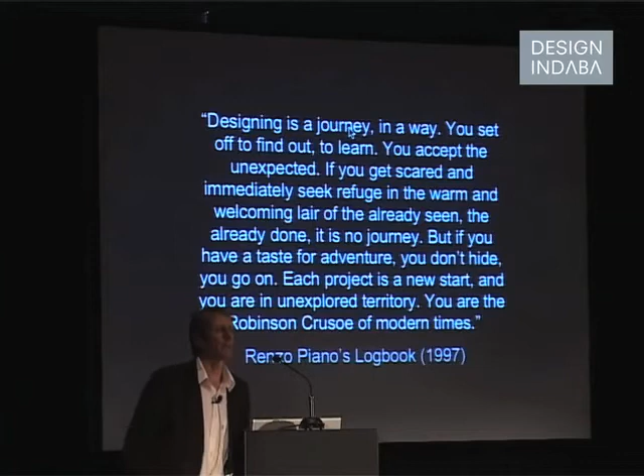One of our role models is Renzo Piano. There's an amazing quote about design and what it's about. Designing is a journey in a way. You set off to find out, to learn. You accept the unexpected. If you get scared and immediately seek refuge in the warm and welcoming lair of the already seen, already done, it's no journey. But if you have a taste for adventure, you don't hide, you go on. Each project is a new start, and you are in unexplored territory. You are the Robinson Crusoe of modern times. Renzo Piano.

Look, life is ironical. I really wanted to be a painter, and my ex-brother-in-law convinced me to become an architect. I now paint, but I have a concern for the city.

Being a busy architect, I believe that's where our interest should be. Our cities are a big concern. A lot of people live outside our cities. The densities of our cities are extremely low. A lot of poor people are traveling annually and daily on a massive scale. Our concern for cities had also brought us to go and study urban design. Pedro did it at WITS and I did it at UCT.

We've got the philosophy that all buildings, in fact, are little cities, and the city is a big house or a home. This notion comes way back from a man called Alberti, who in 1452 wrote guidelines about what the city should be about. He had guidelines for public buildings, houses, townhouses, country houses, etc. That was 1452. It's ironical now that people make suburban houses subscribing to stylistic styles.

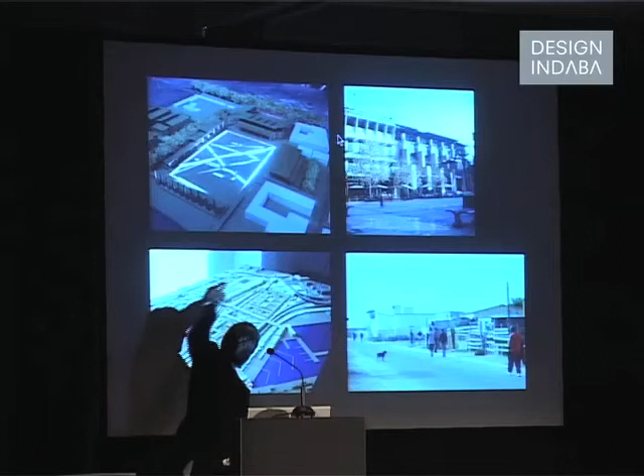The bottom slide indicates work I did with Roelof Uitenbogaardt on the Olympic Village in Cape Town's 2004 bid, done in 1996. It shows part of the city called the Culemborg, the big shunting yards lying unused. The idea was to convert that into public and private development, with a sports center developed over the railway line in a big public space. This would have been the Olympic Village, where about 24,000 people would be living.

On the top right you see the Melrose Arch project, flanking OMM, Andrew and Janina's project on the left, where the Moyo restaurant is in Johannesburg. Our building was part of that pattern of setting the urban spaces around it, making urban space. So in a sense, what we'd like to believe is that our buildings should make urban space wherever they are.

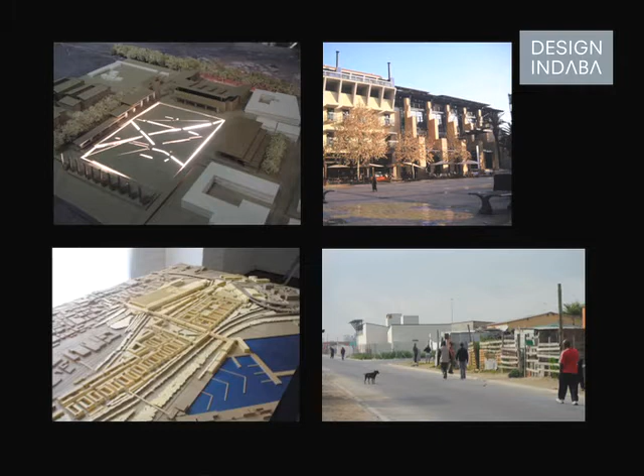The bottom right slide is a little creche we did in Kabodi Street in Brown's Farm in the Cape Flats, where we won a local competition, Jo Noero won the other jointly. We put together two of these creches, which we thought would become prototypical, doubling up as spaces that adults could use at night, and during the day serve as creches.

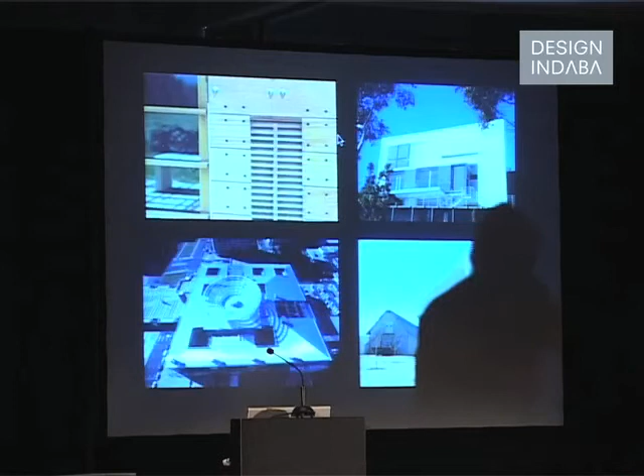The bottom slide indicates the farm I showed you before, where the notions of Cape architecture are expressed in a modern idiom, with the focus again being on the buildings making public space.

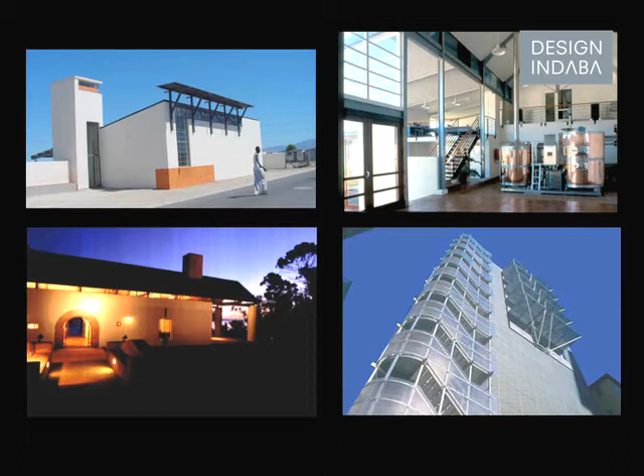Top left you see the creche, the way in which a little tower announces the entrance, and a seat where the children could wait for their mothers after work. This is quite an interesting community street, and the people who live there love it.

On the right-hand side at the top you see the Birkenhead Brewery, much earlier work that we undertook in Stanford. The brewery's kettles are actually exposed on the inside of the building, so you feel part of the brewing process. What they've done subsequently, though, they've changed this building, which makes one believe that once you finish architecture, you must take your photographs and run sometimes.

The bottom left is a building we did in Hermanus called Southwinds. It's really a retreat, based also on the traditional architecture of the Cape, with a roof that's cut loose from its structure, heavy thick walls with small openings. We branded this Corb Cape, referring to Le Corbusier in Cape Dutch architecture.

The bottom right is the Union House building, which is down the road from us, where we really just had to apply an urban screen to protect from the sun, and a new fire escape and balconies.

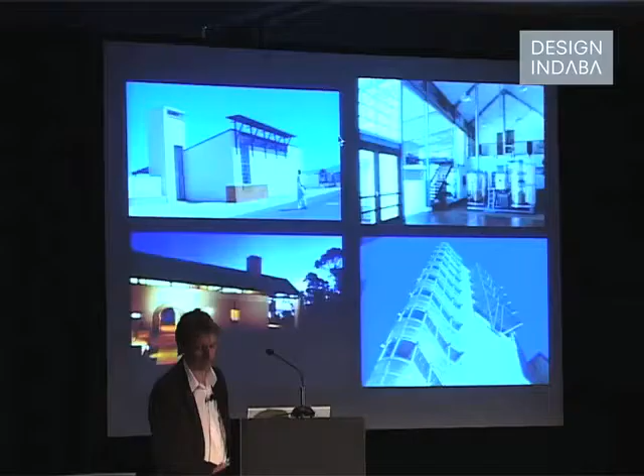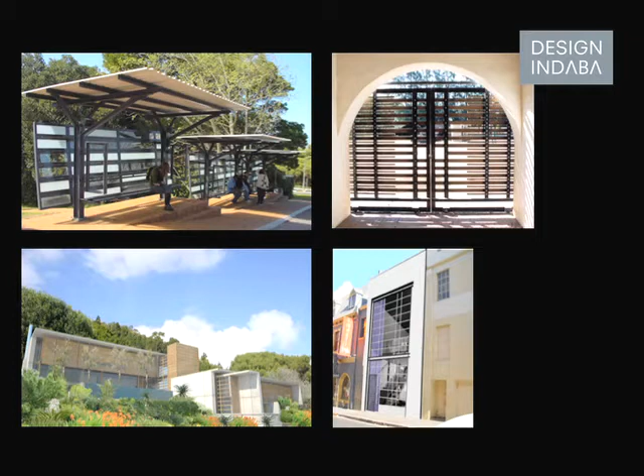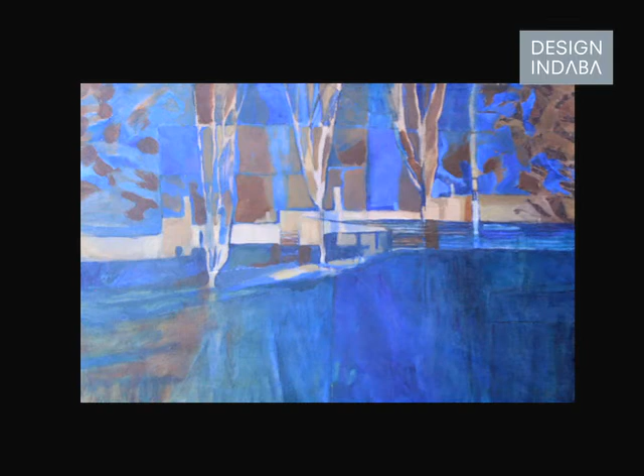In our architecture, we try to blend landscape with building as much as we can, and I think this painting tries to reflect that—the idea of seasons over time.

What I included here is a project we did for the University of Pretoria, the law faculty building there. We partook in a competition of which OMM was part, and Andrew and Janina actually had a wonderful scheme, and I think they still want to build it somewhere else. This was our competition entry, and we again had the notion that the street...

...would be inside the building and the public squares would be inside the building. So the building is really a collection of urban spaces, and we reacted to the existing open space by creating an urban space, so that the building really makes that urban space.

The linear building you see in the front is the library of the law faculty, and at night you see the activity of the students inside there. On the right at the top you can see the auditorium.

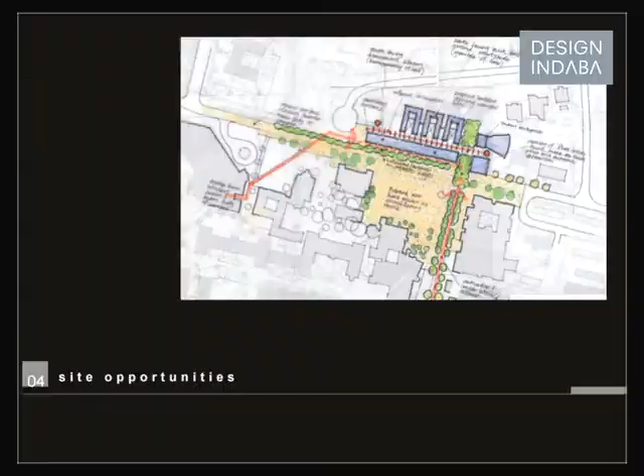The idea was to take this axis of trees through the building and bring that in as the most public entrance. We believe in the strength of diagrams, the notions of expressing the spatial things we'd like to make, before we design the building.

And that's the plan. The green quads you can see are the courtyards where students mingle and sit, and those are the lecture facilities. In the front, the linear building is the Oliver Tambo Library, and in a sense you see through these, through the library, right into the courtyard, and at night they lit up so that you actually see the activity of the students as well as the courtyards internally.

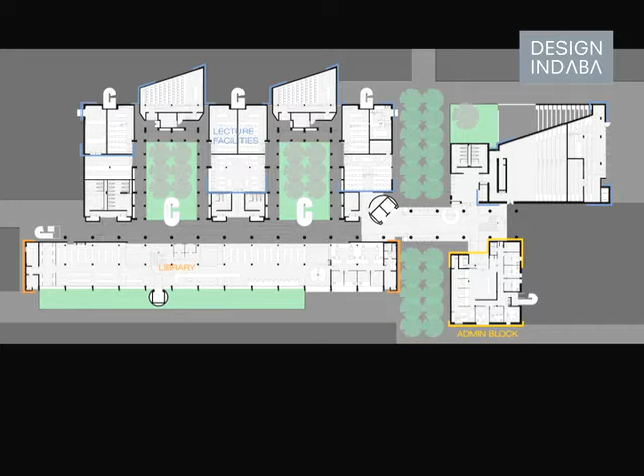What we do in our design process, we work with different techniques. One thing we do is build models of everything, at various scales, starting off at smaller scales of 1 to 500. You'll see later when we show the BP building. This is an early model of the law faculty building, which also makes us understand how to resolve details.

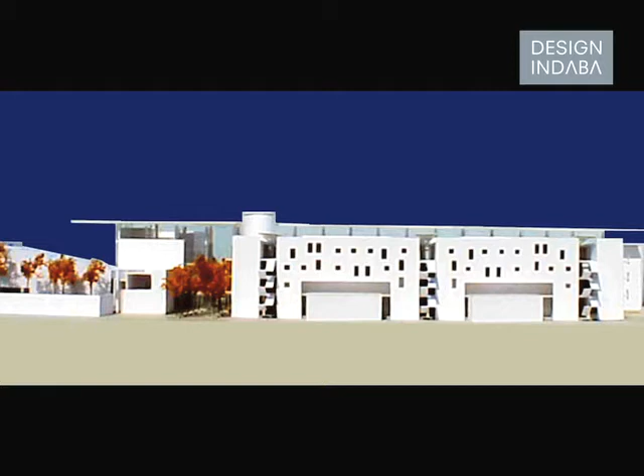Also using three-dimensional modeling, the way you can see through the library into the courtyards, to make the client understand what we'd like to achieve.

Now this is the law faculty building. On the right you see the Center for Human Rights, which has got a good international reputation. Then the entrance, which is the main focus, and the library to the left. A night shot of that.

In most of these bureaucratic institutions, the offices actually become quite boring and repetitive. Eben van den Berg, who's here today, took me seriously when I said couldn't we throw these windows around a bit. He investigated ways to get each of these offices to have different looking windows. So although the offices are quite standard, each window individually looks different, giving the office a different spatial quality.

And then we've got these pop-out balconies, smokers' balconies that people could use. They're made in steel, and also the fire escapes.

In our architecture, we try in everything that we do to express the notions of heavy and light, the earth and the sky. In many ways, that's expressed in many different ways in projects.

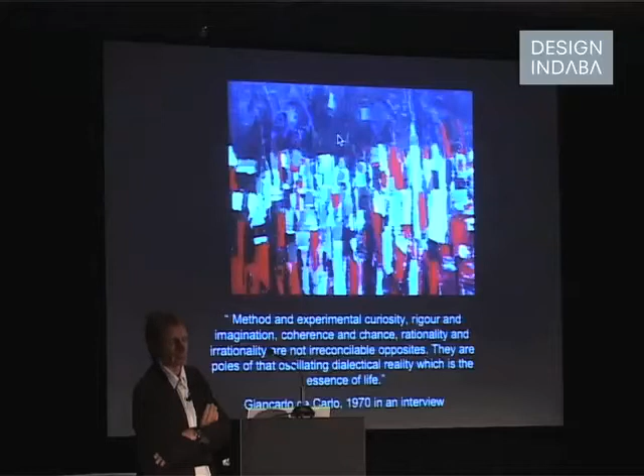And this painting, in a sense, reflects the urban world, also reflecting people, I think. People read different things in it. I made it over Christmas, and I titled it Father Christmas Was Here.

I'm going to show you the BP competition first. I think people might have seen it, but it's good for those who haven't to see the process we undertook to firstly win the BP competition, and then secondly to implement it.

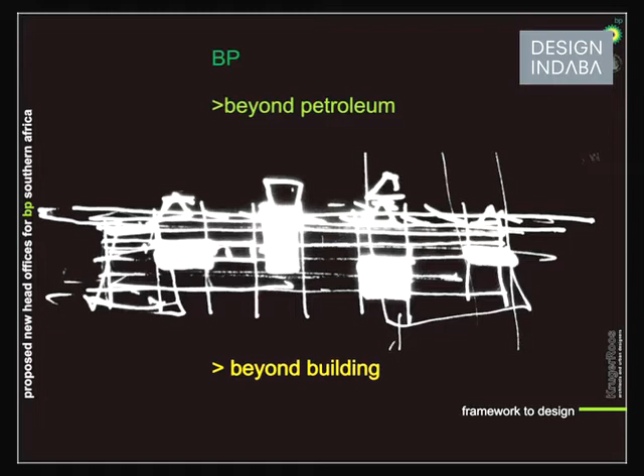This is an elevational sketch. When we presented to BP, we said we're not presenting a fixed concept, a fixed design, but basically doing a framework for design, a way in which they can interpret within the framework which they want.

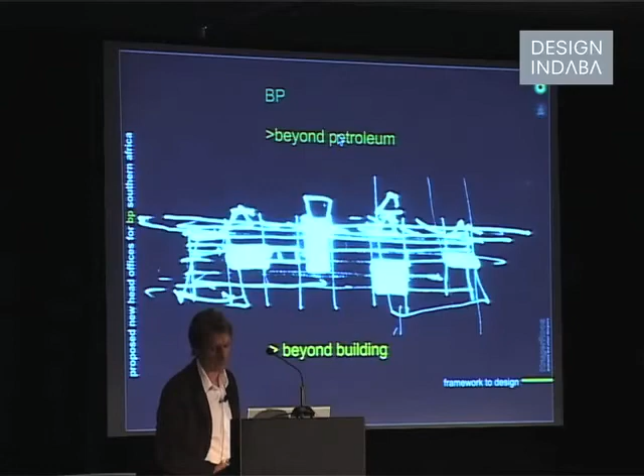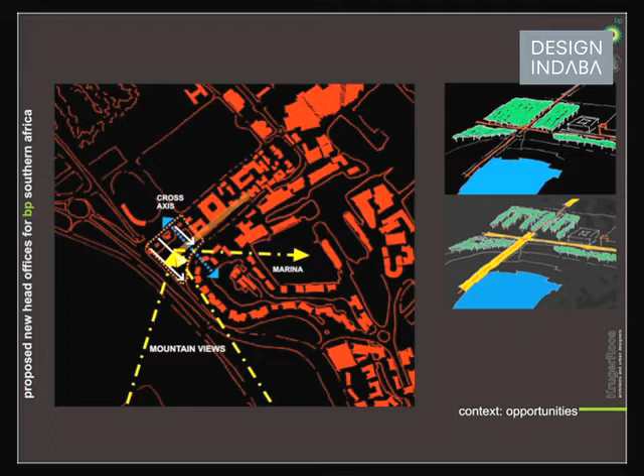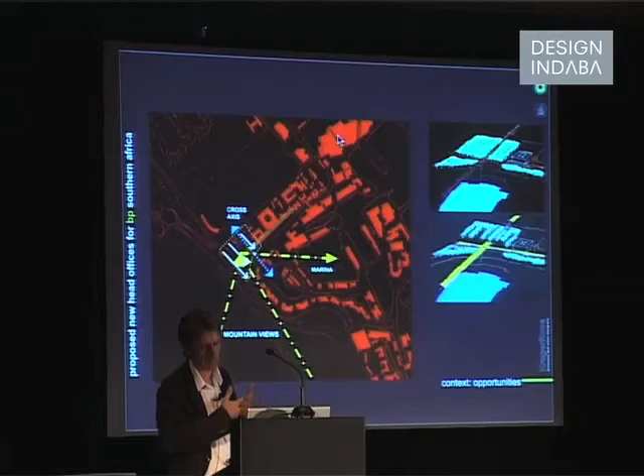So it was the idea of the cardo and decumanus, the way in which the crossroads meet, and that the building really then sits in the forest, becoming a sort of finger of built fabric into the finger of the forest.

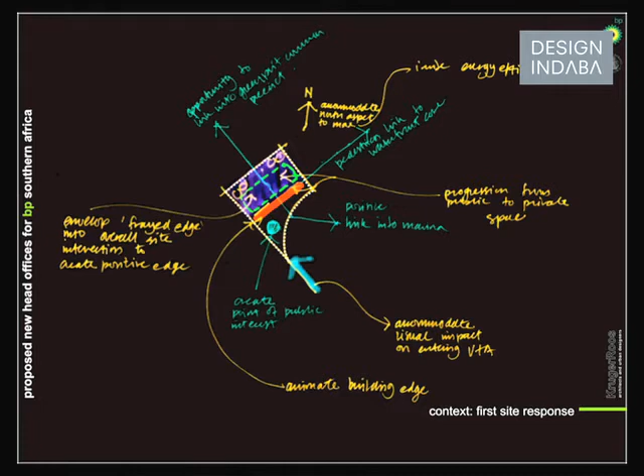That's just a diagram that Pedro did, that red line indicating the reaction to the pedestrian link. And we had the idea of a public institution, the circle in the front, that would face Dock Road.

Now this diagram was after a lot of deliberation, after a lot of thinking about where we should orientate this, because in a sense the Cape Town grid is at 45 degrees with north. So it sits, and Portswood Ridge follows that orthogonal grid. Therefore the building, if it responded to Portswood Ridge, would have to be swung at 45 degrees, and we felt it was more important to stick with the orthogonal patterning of Portswood Ridge. So we came up with the idea of just making the building quite simple.

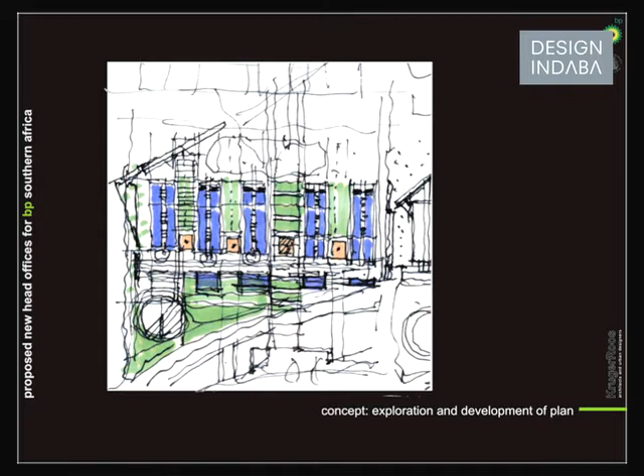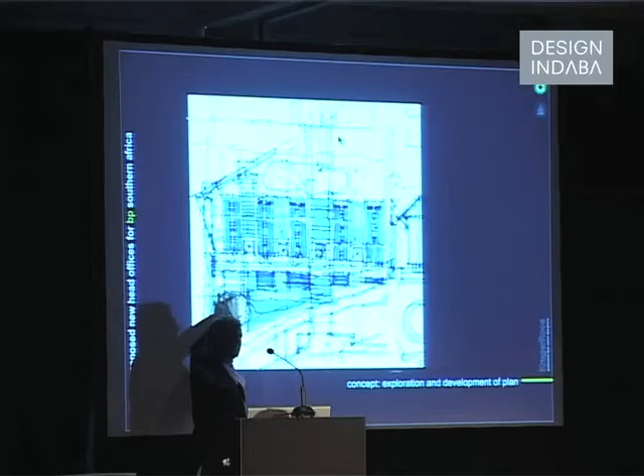5 fingers that meet the forest, an idea of a big pergola that would float over and give shade, so that when you sit in the building, you almost feel like you're sitting in a forest. In the white, you see the public street that we envisaged here, and these little things would become the meeting rooms of BP, a public community institution at that point, also sitting in a forest.

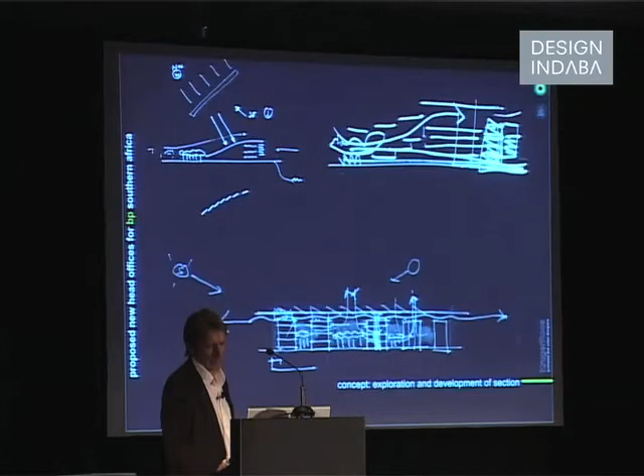We investigated things conceptually also on section, the idea of the forest cooling the building. The pergola would actually shade the whole space, and it becomes a dynamic skin. We built a little conceptual model, a small-scale model, just to indicate how the building would ventilate and so forth. And we had these huge skylights which would allow light in, but would also serve as heat extraction.

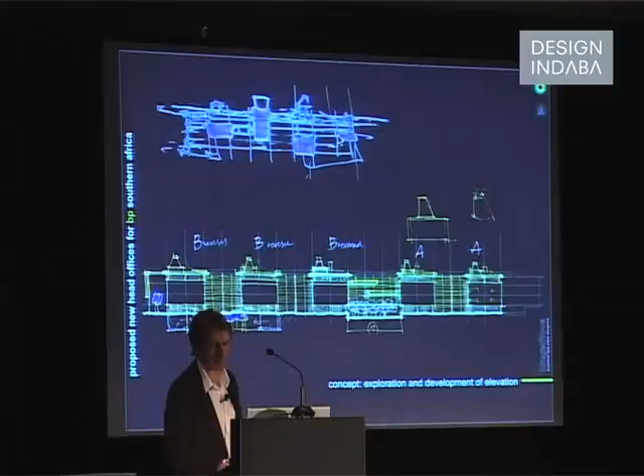Now those facades really have a symmetry about them, but also asymmetry, and we often do that in our architecture. We believe in this thing of moving things, actually the energy of things being in the asymmetry.

Now, at the early times we were still learning. We had Eric Noir on board from Green by Design, who worked from Johannesburg and had really been studying environmental architecture, and he gave us advice. We came with all these ideas, and he said, yeah, you can do this, you can do that, and so on. Of course, in the end, we learned later that it's all not quite practical.

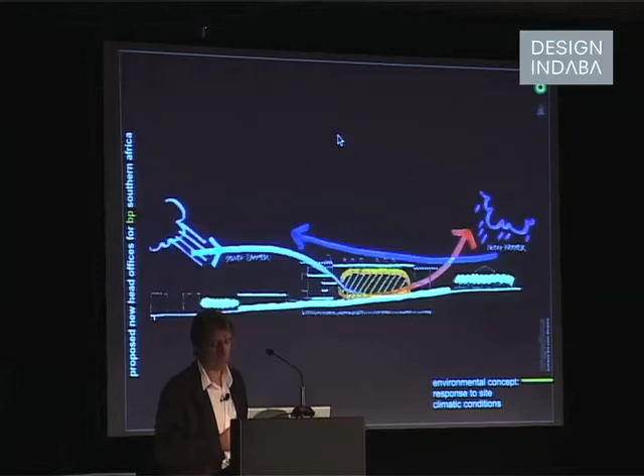At the time, we thought we could use the southeaster to also have a cooling effect, and use the northwester over the forest of trees to cool down over the roof of the building. Because buildings mainly build up heat from all the machines and all the energy of the people, you've got to remove heat from buildings mostly.

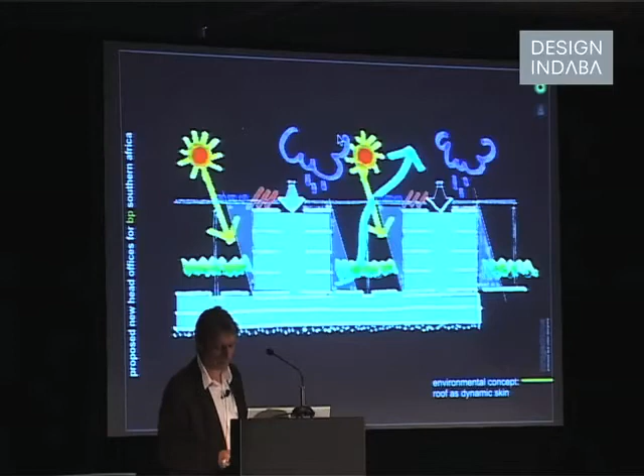The other thing about South Africa, different to Europe, is that you want to keep the sun out of our buildings. In Europe, with double glazing and the technologies they can afford there, they merely want the sun.

The roof served as a dynamic skin, allowing both the sun to come in diurnally - in red, indicating the solar panels that one would get - collecting rainwater off the roof, helping with the cooling effect. And then we had this notion of photovoltaic cells, which BP made. BP Solar make these photovoltaic cells, and they were applied to the building later.

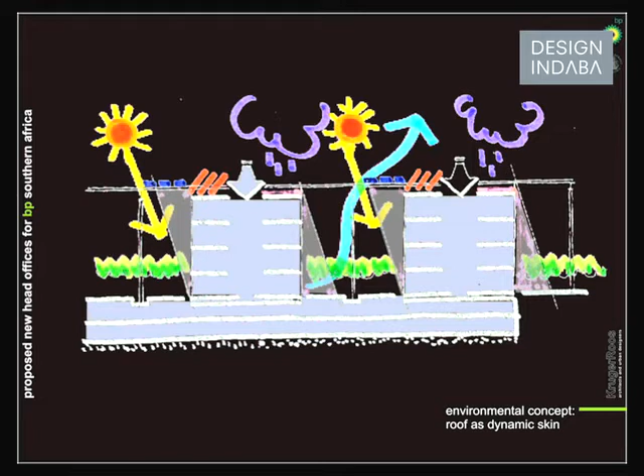Now, the idea of summer and winter, when you need the sun, you could actually heat your facade, as you see in red there. And then this big pergola lattice work to get the sunlight to come in, and daylight would come through these skylights.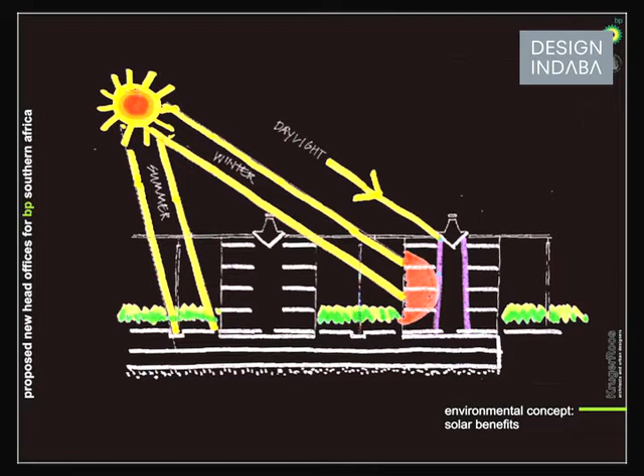We also looked at water cooling, using the basin to cool, and we looked at rock storage. The problem with rock storage, though, is that Cape Town has a composite climate, and it turned out to not be cost efficient to try and do that. It would probably be working better in a place like the Highveld or the Karoo.

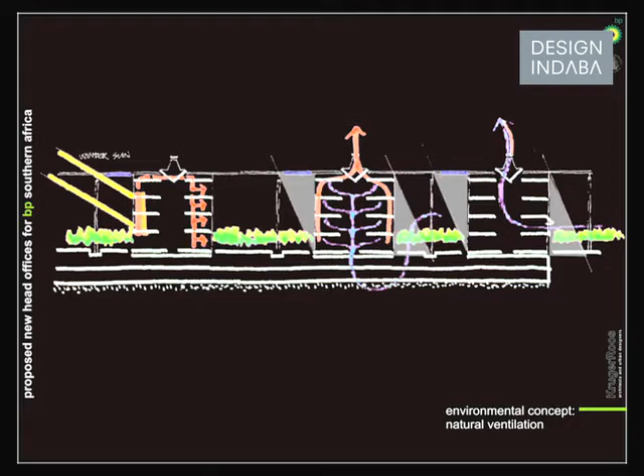Yeah, so the environmental concept was to capture winter sun, to cool the building down through evaporative cooling through the courtyards with water cooling, etc. That was the early ideas.

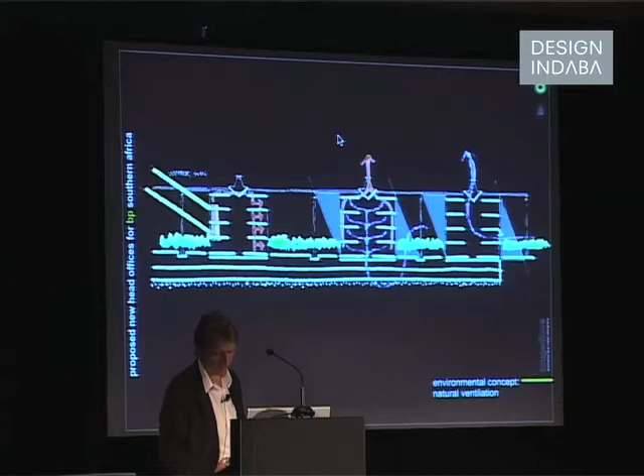And we reacted in a sense to Ove Arup's brief. Adrian Campbell, who's a Scottish Londoner who lived in South Africa, developed the brief for BP.

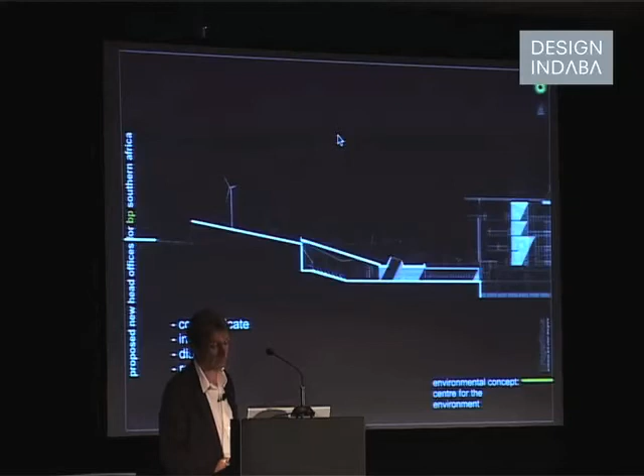The section there is showing you the idea of that public space in the front, a place where we thought people could communicate, invent, dialogue, talk about green design, what it's all about. We had notions of a little turbine at the end there, just as a little thing that could also generate energy and reflect the image of the green design.

This really was, in our view, what we would have liked to achieve, so that this building would actually be linked to the water edge by getting a terraced garden that would come down to the waterfront. So we were taking a bit of urban design license here and designing the bigger scheme of things.

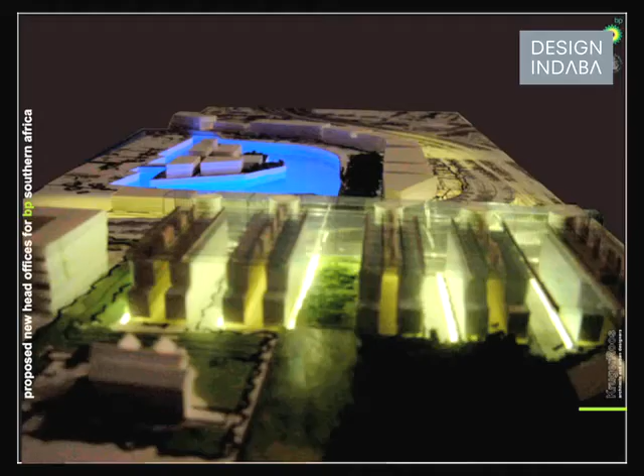Another photograph of that - you look down that tunnel, which will be like a ramblas, so the urban buildings then create the facades. And there was the idea of this island where a new hotel is going to come, which Sol Kerzner is going to build.

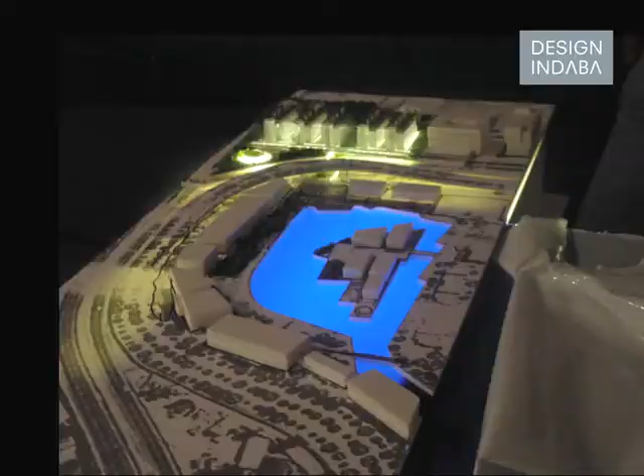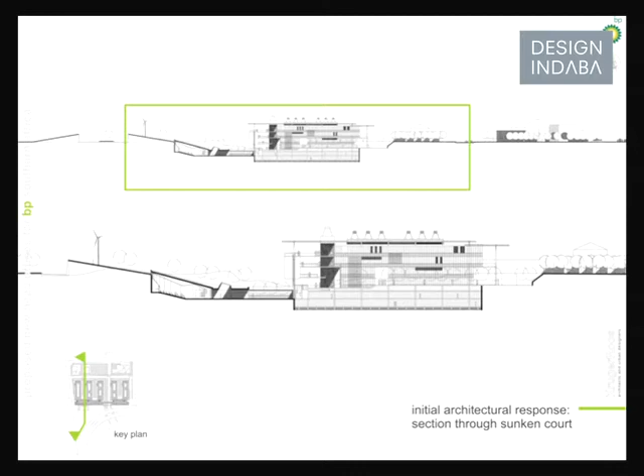That's the plan. We had narrow footprints, with floor plates of about 12 to 15 meters in our investigations. We believed we could cross-ventilate these buildings and that the facades would actually be made in glass, because sitting under this roof, there's no problem with direct sun gain, and when you need it in winter, it's actually there.

And that's a cross-section of it. At the time, it was a 4-story building, because the V&A also wanted to have some offices within the complex. We had the idea that BP would be in 4 of these, and one of them would be for tenants they would get in the future.

You could see the step garden in the middle coming down. This high street would actually come through and over, similar to the convention center here, linking to the Arabella. At the bottom left you could see the section through - it's actually quite a narrow footprint.

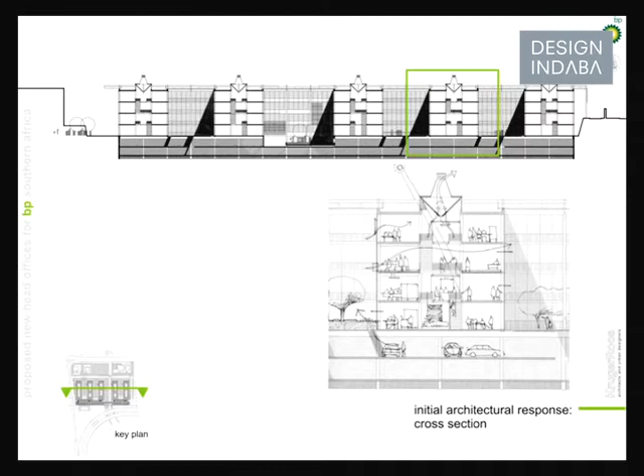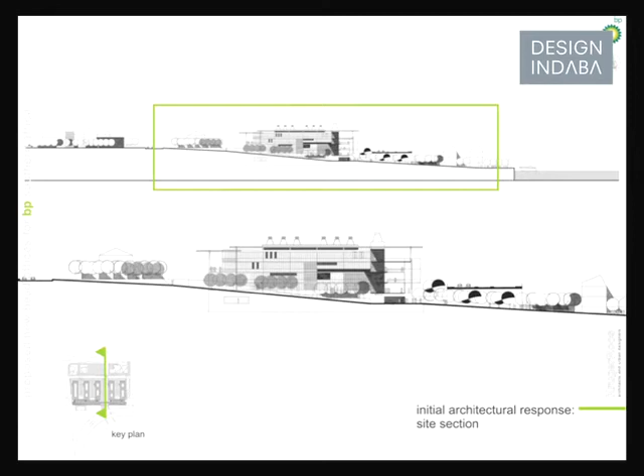I must say, during the process of the real project, we doubted the fat footprint we were given to make a corporate head office, because that's how things changed - people wanted a more consolidated, big plan. Then one day somebody came with a magazine where Richard Rogers also did a very big, fat building, and we realized it could be quite possible if we put the street inside - but we'll show you that later.

One of my sketches indicating that street, and Pedro used to explain them - we had glass columns, but it's just the way I draw.

Seeing through the space, looking into those courtyards, the high street, you see the public space, a sunken courtyard at the back there. The way we saw it, this could have been an auditorium where people could come for either research or there could be concerts out there, creating a new public entity at that edge of the waterfront where there's not really much happening.

A lot of offices, and then the GSB, which has a hotel attached to it. So it will give it another public amenity, taking it a little bit away and making the waterfront a little bit more mixed use.

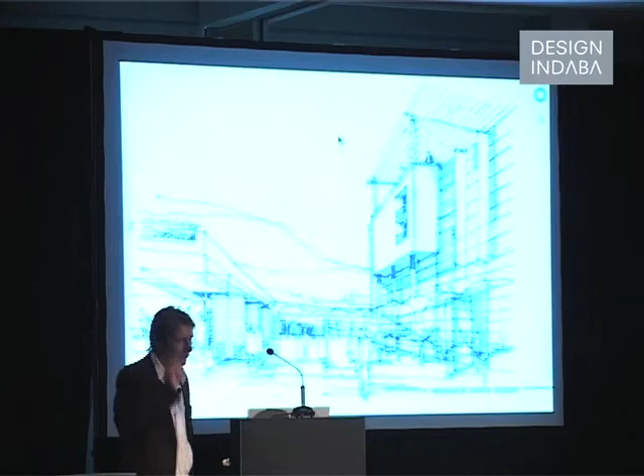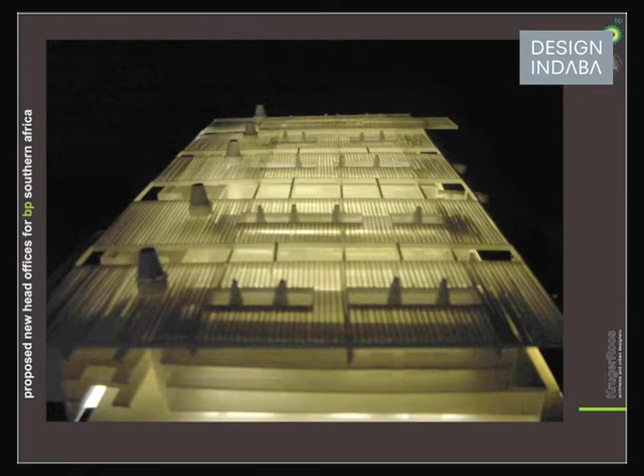And that's the bigger model that we built. Those chimneys on the Great Street - we had huge chimneys which were on top of the lift shafts, and then you had the smaller ones over the pergola roof. Facades in the front, and the street then really covered by that pergola.

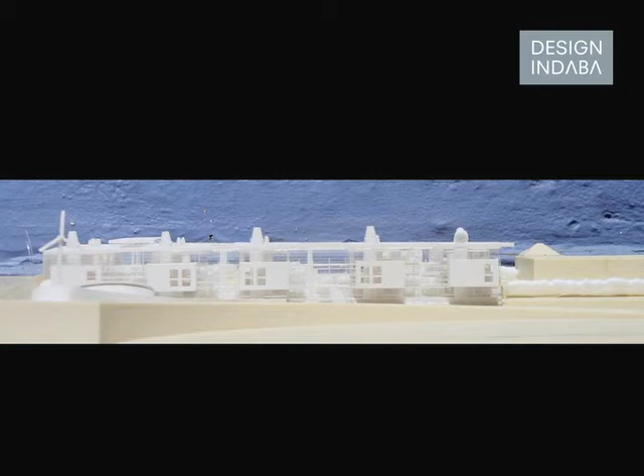And that's the model as you see it, how it came out finally. We were required to all build the model at the same scale, scale 1 to 200, and they gave us this cast thing that we just had to plonk our model into. It was quite good to see all the different architectural responses.

Now, in a sense, what I believe is most important in the city is really not only the footprint, but also the urban wall. This painting in a sense represents the urban wall, the transition between countryside and city. And in the architectural review, they wrote this piece which said the building is modest, rather than loud, with a palette of materials and details restricted, direct and intelligible.

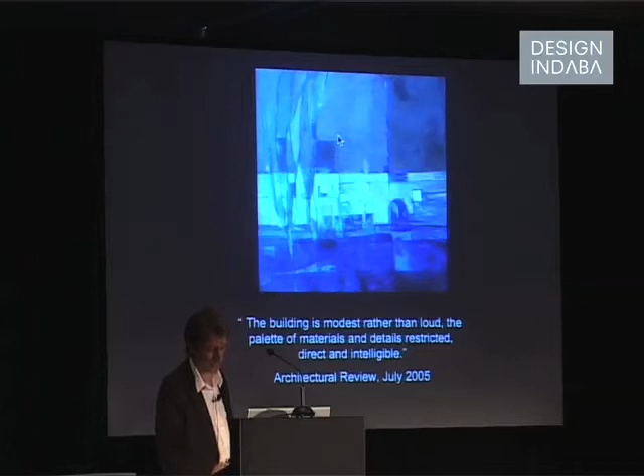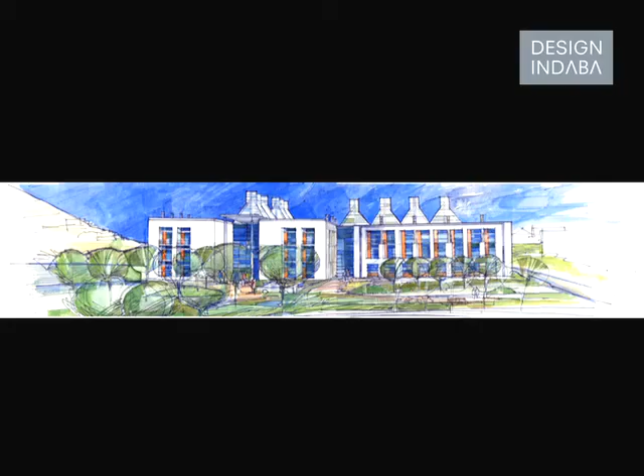What we realized through the process, and when we doubted ourselves - we had huge arguments with the engineers, we doubted the engineers, we doubted the process, the footprint and all of that - was that it's all about orientation, all about how things are orientated in buildings when you design them this way. It's basically the first lesson you should learn in first year: orientation and keeping the sun away from facades are of the utmost importance if you want a building that works well environmentally inside.

So we actually stuck with the orthogonal pattern of Portswood Ridge. We inherited, in a sense, a bigger footprint, and we decided that the facades become hugely important - not only the facades exposed vertically, but also horizontally. We had these lanterns expressed in such a way that they bring light in but don't allow sun to come in, which gave us another interesting challenge.

Now this is what the building looked like. It reflects, I think, in a sense, the engineering of the whole process of the building, and I'll take you through all of that in detail. So in a sense, it's very much an engineered building, and I've asked the engineers also to express how they feel about the building and what we've achieved.

So you see these lanterns on the top and those photovoltaic banks that sit there. The facade expresses, in a sense, the ventilation of the building. And you have these light shelves that we will explain. And the entrance canopy also has photovoltaic cells. So in a sense, all the energy values of the building are reflected.

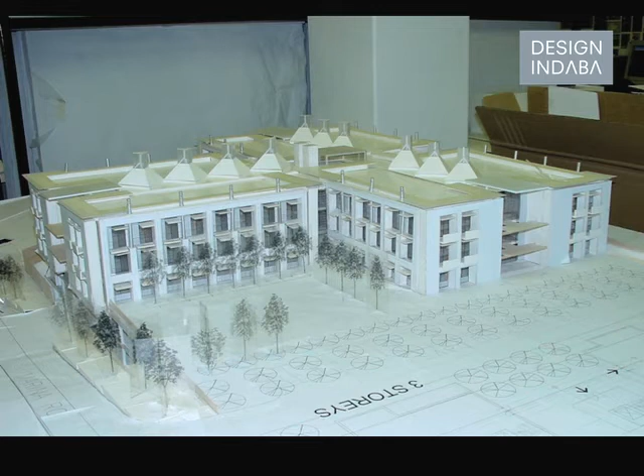We built a big working model. Rafik Conrad, who worked with us, did this. And everybody just cut this model up and reinvented it and solved details. We often do that. Building big models is a way of solving details for us. They're not necessarily beautiful models, but they're working pieces.

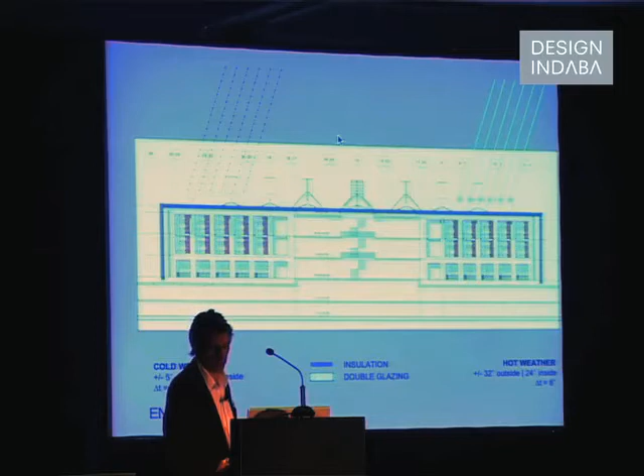The envelope of the building in cold weather, when you have the rain, and in hot weather, the extreme conditions being -5 or 32 degrees outside. The building is then insulated well. It's a concrete structure. There's double glazing on facades where we need it, where it's exposed to the weather, to the sun mostly. And the shading of the deep-set facades helps to shade the building efficiently.

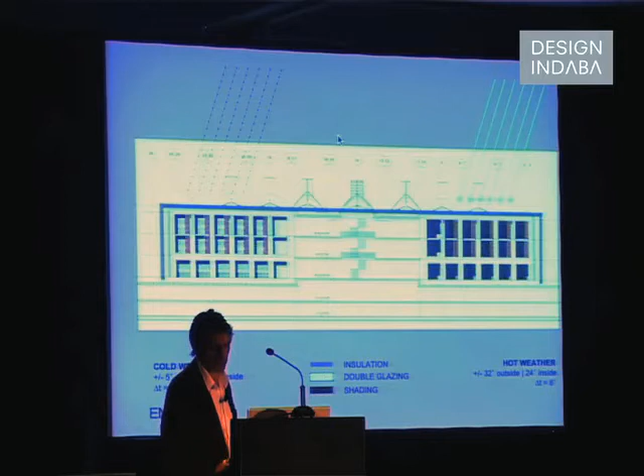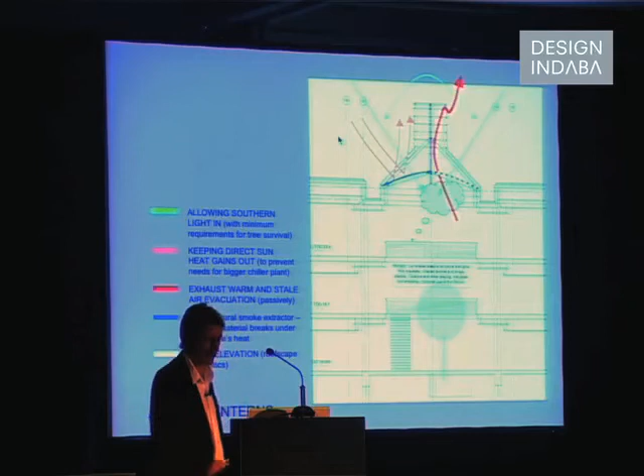The atrium lanterns serve both the function of allowing southern light in, so the trees could actually get light. They keep direct sunlight out to prevent heat gain. And they serve as exhaust fumes to take out warm and stale air. And they also serve as fire protection. At the time of a fire, there will be a fuse that releases the material to break open and the smoke to extract. It also serves then as the fifth elevation, reflecting in a sense the roofscape which is seen from Greenpoint, which looks right down onto it.

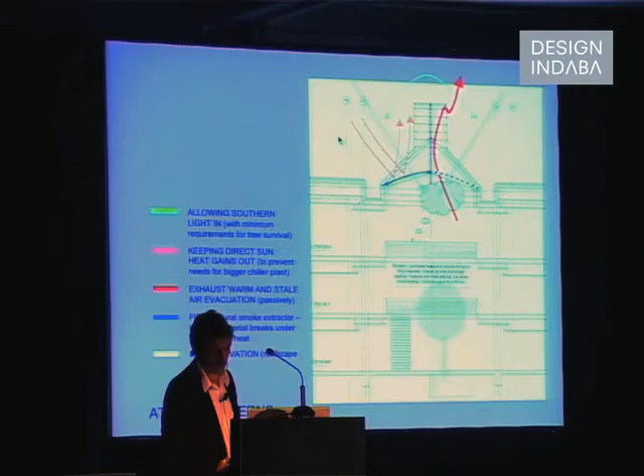We built a little model of these lanterns. Jan Wassenaar is also here. He took me seriously when I made a little sketch, made a model which then everybody got excited about. We built it a few times, and then the engineers helped us to orientate it correctly. We firstly wanted orthogonal with the building atriums. Eventually it developed into a diagonal placing because of the diagonal grid. So these skylights are designed in such a way allowing light in, keeping direct sunlight out to the west and the north, and taking out the exhaust fumes and the fire, as I've said before.

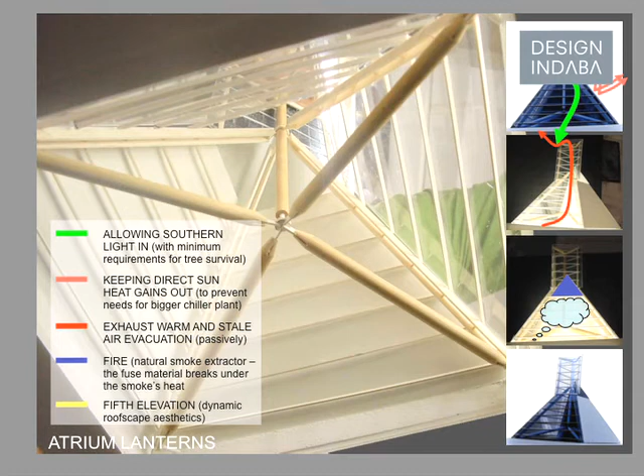And then the lights in the building are dimmable lights, which work with the diurnal cycle. They give adequate light levels throughout the day by using the light shelves that give light penetration into the building, then saving on energy. So as the sun comes around the building, these dimmable lights change.

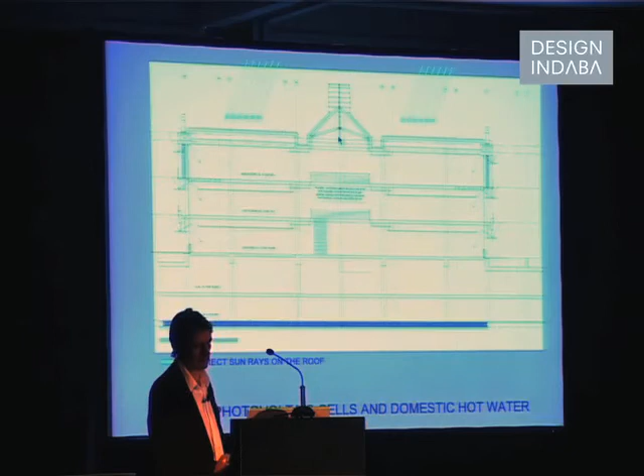On the roof are photovoltaic cells and the domestic hot water system, which handles all the hot water production of the building. Photovoltaic panels over the roof, you'll see them now, contributing to 10%, which is put into the grid.

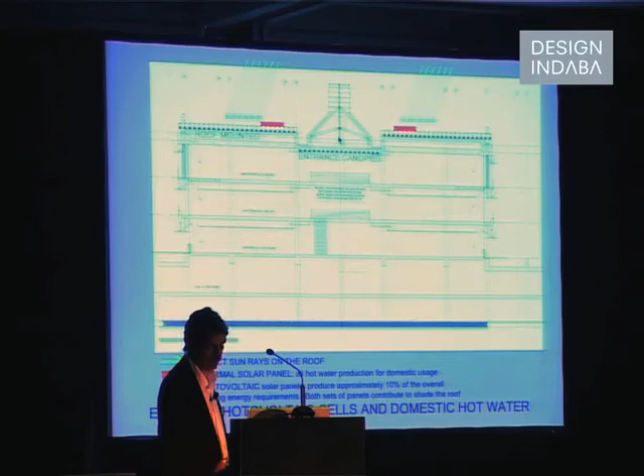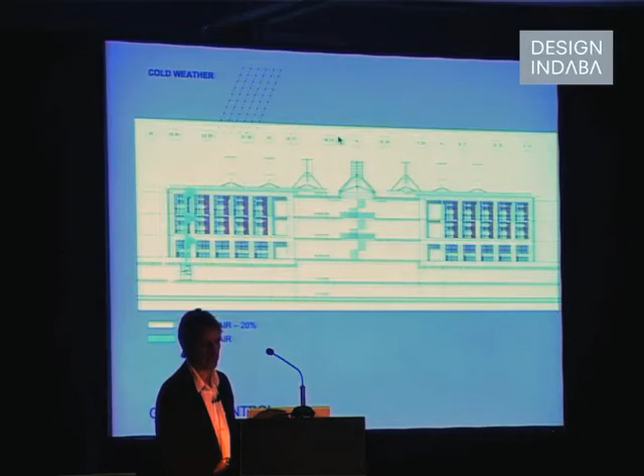Climatic control, cold weather, in extreme conditions, you don't want more than 20% fresh air intake. But you don't want to make the building colder. The supply air then comes into an air handling unit, supply air coming back into the building. The heating elements at the diffusers give heating to the office spaces. And then the return air, 80% coming back. Then you have a pressure discharge through these whirlybird elements where the stale air gets out.

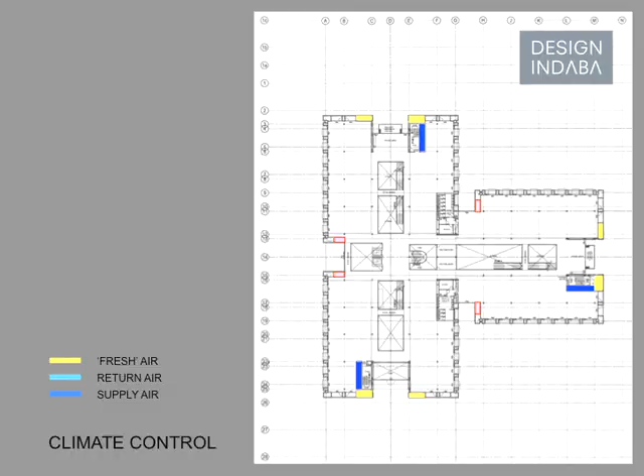In hot weather conditions, you have the same situation, 20% fresh air coming in. Supply air, return air 80%. Of course, you get pressure discharge of warm air. This works also on a diurnal cycle, not only seasonal, because in summer you may get cool days in the mornings, so that air conditioning system would actually come in and work on a 20% cycle if it's cold outside. And as the day progresses and things warm up, it gets heated and goes on to the 100% cycle. The fresh air comes into the edges of the building that we called bookends.

They were treated very solidly because we didn't want too much sun gain on the north and west orientation. Return air goes into those hidden areas which sit on the insides of the facades, because you don't want heat gains in the coolth of the building. The supply air comes inside next to the fire escapes.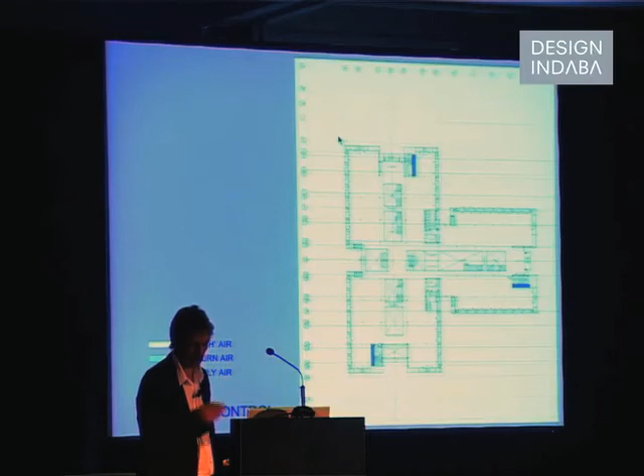You can see the atriums of the building there, and those are over which those lanterns are structured. So in intermediate weather, it's 100% intake, no return air, and that's during the bulk of the time.

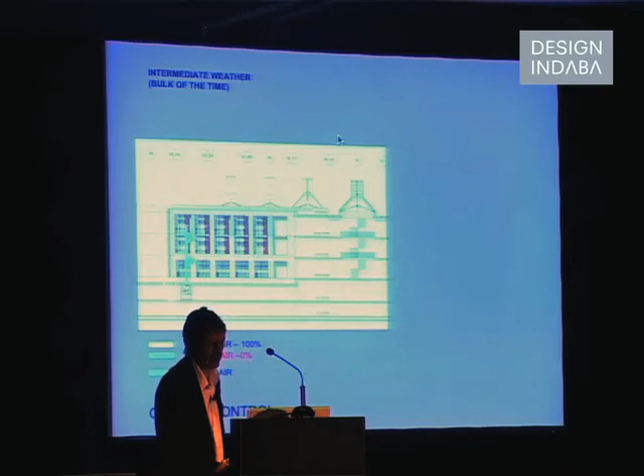They also purge the building. So the building gets purged in the early mornings of the day with fresh air, and it's therefore got a very pleasant feel about it when you enter it, a fresh air feel. And that's the way in which the discharge takes place.

So in a sense, the air supply is mechanically driven. We had to do that to achieve the benchmark set by Ove Arup. But the air discharge and exhaust is passively driven, and that's what is reflected by these whirlybirds and these thermal chimneys.

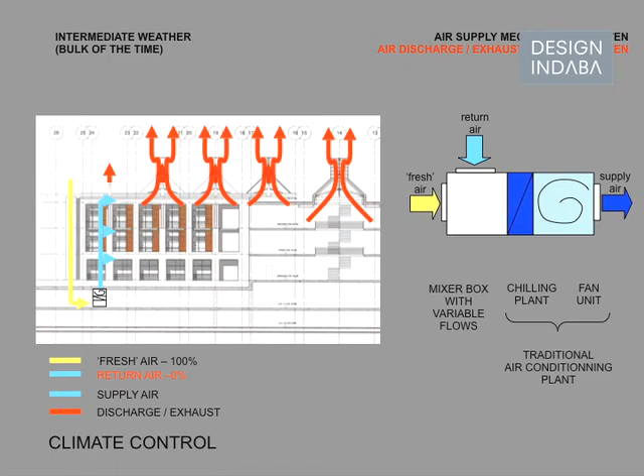The chilling plant, in a sense, is like a traditional air conditioning unit plant with a mixer box, with variable flows that control fresh air and return air in those cycles. So hot, cold weather - that's the section, how it works.

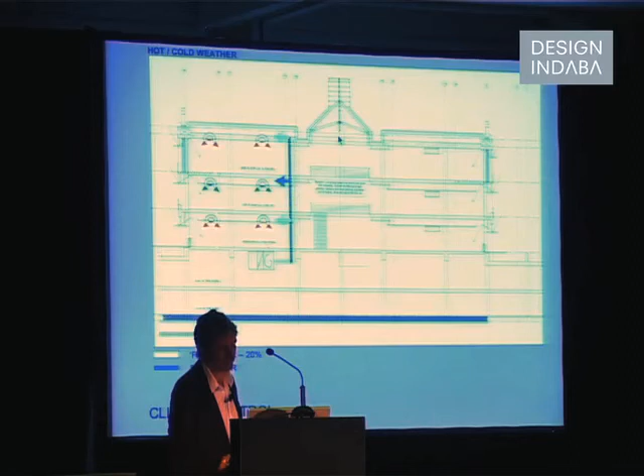The diffuser brings in either heating or cold on the 20-80% cycle. Return air, 80%, going back into the basement. Pressure discharge at the top. Fresh air cycle 100%: you have supply air, exhaust air coming out, no return air. And the basement works with natural ventilation.

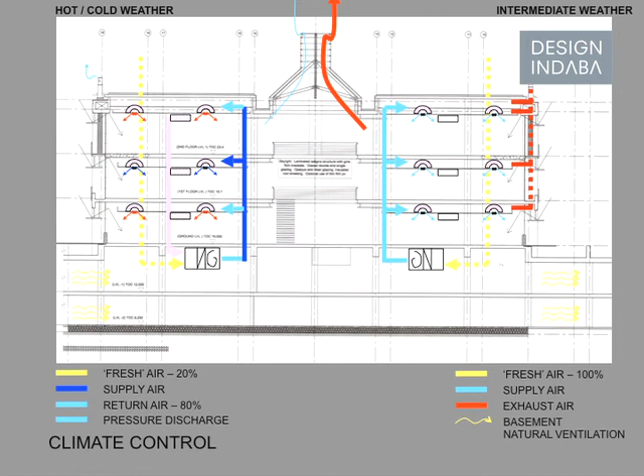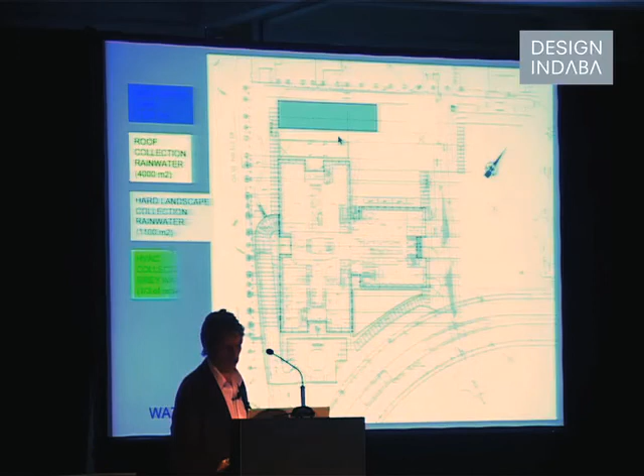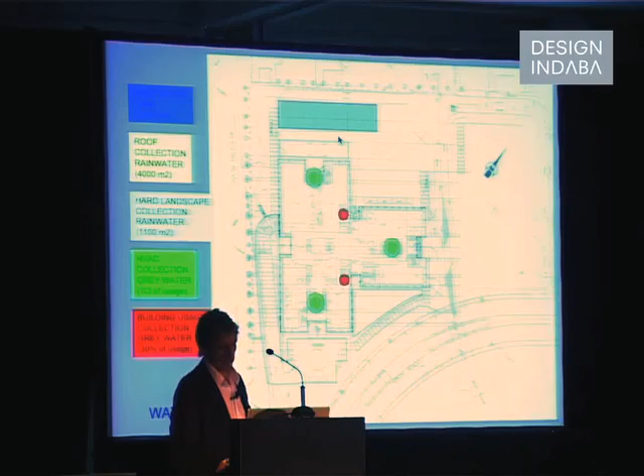The water is captured in a big tank in the basement, grey water. It's about 1,350 cubic meters. It collects 4,000 square meters of the roof, 1,100 of hard landscaping, and also the grey water off the air conditioning system, which is about a third of the usage. The building usage also collects grey water into that tank, about 30% of the use.

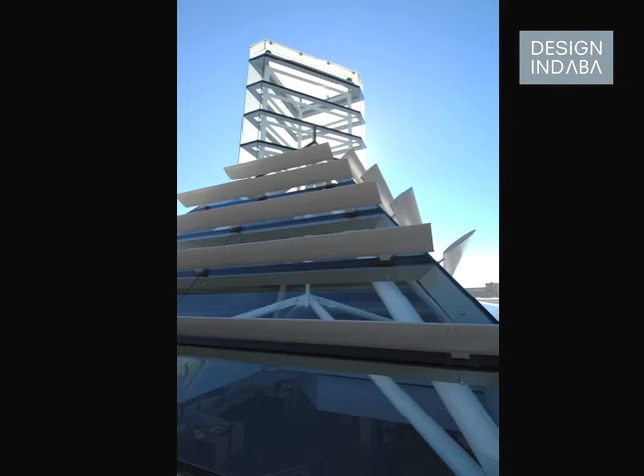The building facades, in a sense, reflect the engineering - you can see those light shelves at the top, chimneys expressing, skylights, photovoltaic cells on the roof. See the skylights, the way they're designed. They've also got these fins on in order to prevent the direct 12 o'clock sun from entering them.

So they're designed in such a way, with special glass, to prevent sun as it moves around the facades from getting into the building, but still getting light in. The timber that we used is local, from Zimbabwe - rose gum. And the trees would hopefully grow. Stairs, also rose gum stairs, with a steel structure supporting that.

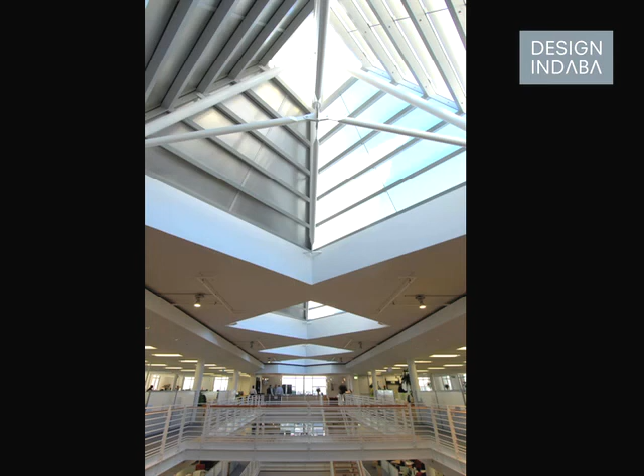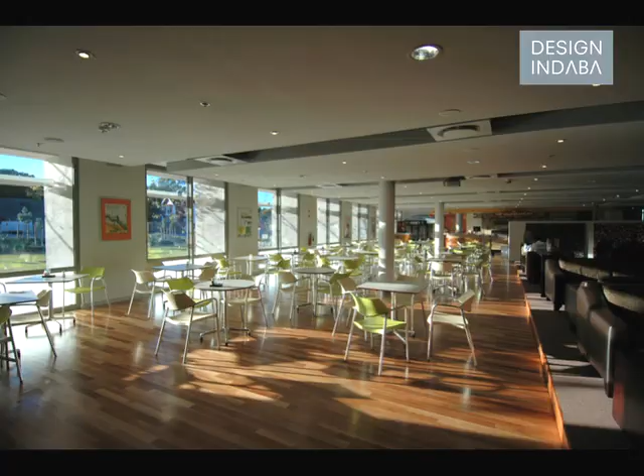Skylights, this main stair going up to the roof. The Wild Bean, which is the little canteen, is on the one edge of the building. This is winter sun coming in. Skylights at night - they're quite beautiful objects in themselves.

These are quotes from the engineers. I think Eric Noir felt that the building has diffused the stigma that all these buildings should look like a dog's breakfast, or that they should be residential. Andrew Aiken believed that it's very important that the vast energy resource wastage you get on building sites and in the building environment has been addressed with this building. We have waste - the waste was actually sorted on site and taken away in specific packages.

Patrick Costello believes that we used existing technologies to be quite innovative in resolving things. And Rob McNamara believed that from a green energy efficiency perspective, the building, with its extensive photovoltaic array providing approximately 50 kilowatts of electrical energy, has really gone a long way to saving electrical power.

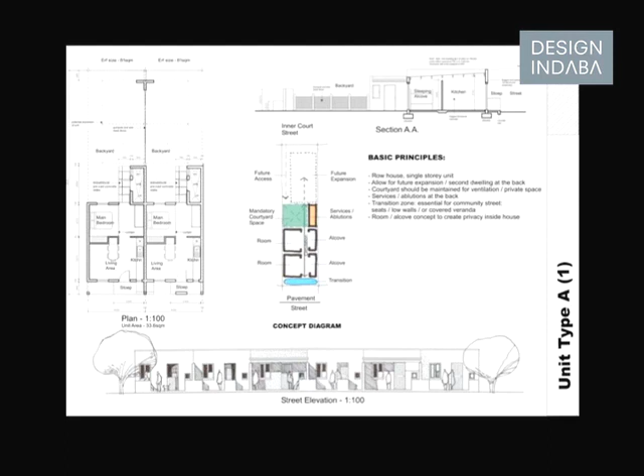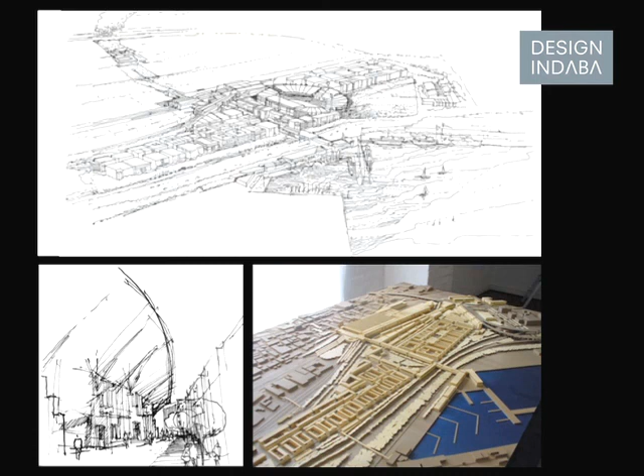And then finally, the idea of the Greenpoint Stadium - the idea of an arena in the city, and the way in which you can structure it to create urbanity. Thank you, that's all.